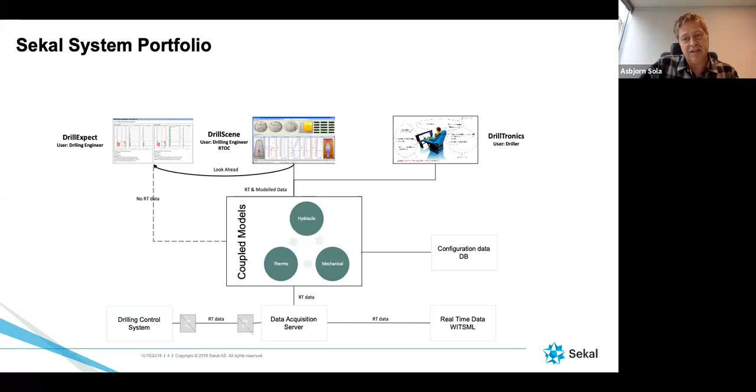When you have the safeguards active, you can then start running autonomous functions, like starting and stopping the mud pumps. I'll get back to that further.

On top of this, we have a screen currently under massive development called DrillAware, a screen that could be put in front of any relevant user — the driller, a real-time operation center, or a drilling engineer who is just planning a well.

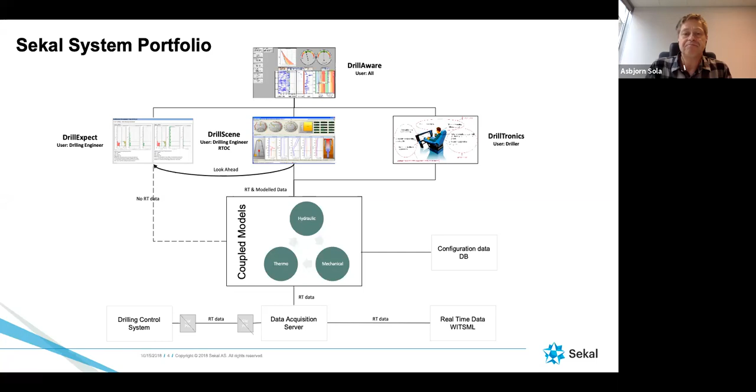So the experienced value proposition that we see is that the elements that we address is the NPT and the safety. So everyone, of course, wants to secure well integrity and make sure that everyone stays within the pressure window. So it's about avoiding swab, avoiding collapse, avoiding surge. So you see there on the graph that the modeled ECD and ESD can be shown at any time in real time. And you don't even have to have wired pipe for that to be shown like that.

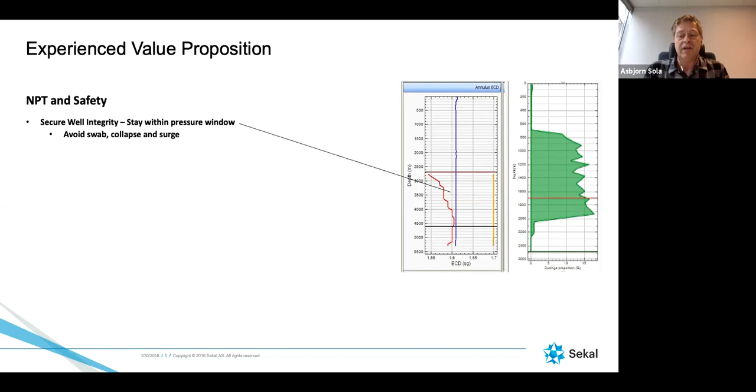Next thing is that you don't want to have your pipe stuck. And if we look into statistics from DrillScene, DrillScene has been applied for more than 350 wells at the moment. And we got some statistics from the Norwegian Petroleum Directorate, and we started looking into how many sidetracks, technical sidetracks, there have been with DrillScene being used compared to the statistics before DrillScene was used. And statistically, we can then see that we have saved 77 technical sidetracks.

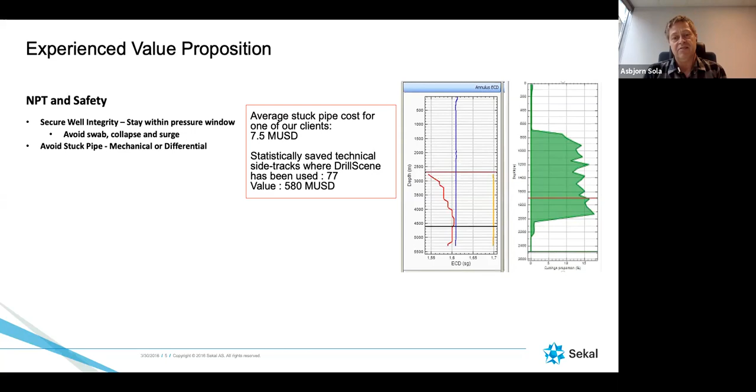And one of the clients, which is an offshore operator, says that the average cost of a sidetrack is $7.5 million. If you do the very big math here, that's $580 million in statistical sidetracks that have not taken place.

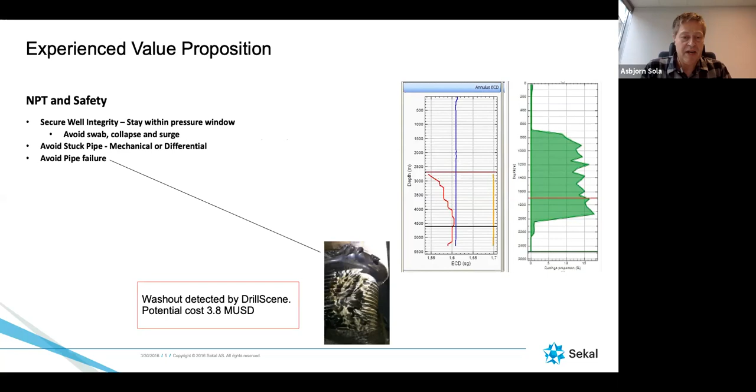Another element is that you don't want your pipe to fail. And we have a lot of cases where we have guided the client that you most likely have a pipe washout situation. And then it's up to the client whether to trip out or to look further into if that is really an issue. So the example picture you see there, we have had a lot of these cases, and you can imagine the cost of that should that twist off, and you have at best a successful fishing job.

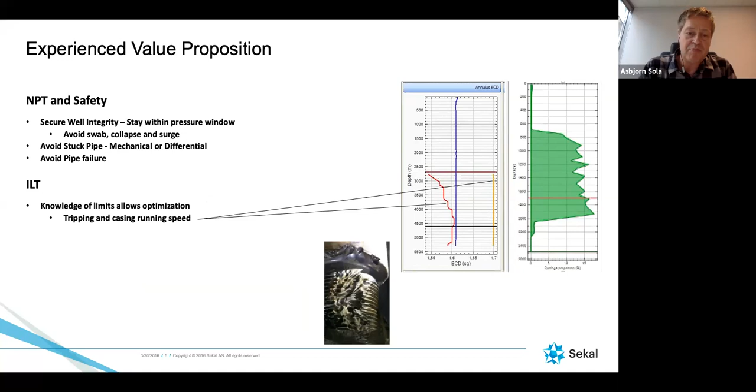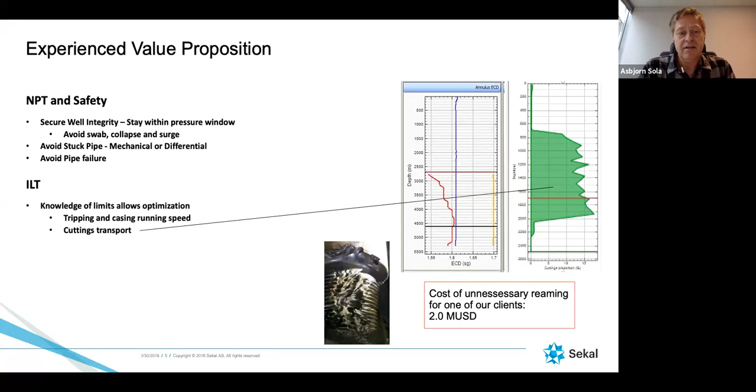That's the NPT element. If we go over to the ILT, or invisible lost time elements, when you do modeling and you have good input and configuration as we have today, then you know the limits of your wellbore. And that is, of course, much easier to optimize. So you can then better optimize tripping and casing running speed. You can have a view of how is your cutting load in your wellbore. Are you building cuttings bed? How is the cuttings in suspension in your mud, in your wellbore, and where are they?

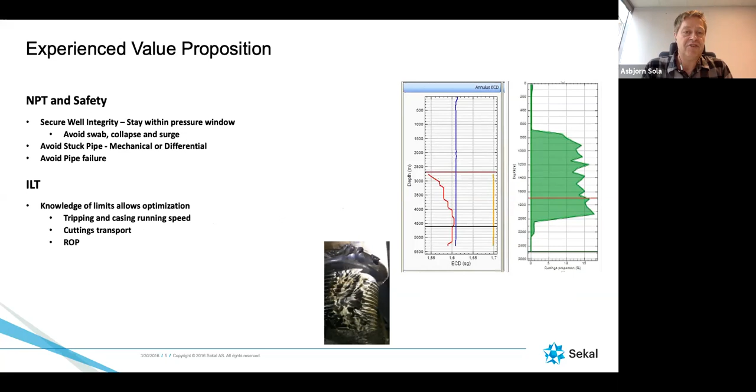And of course, ROP, you can then use these models to guide the ROP in such a way that you're not running necessarily at the maximum ROP, but you're running at that ROP that makes sure that you stay in your window and you maintain sufficient cuttings transport.

DrillTronics is the drilling automation tool, and that was first time installed on Statfjord C in 2013. Since then, several floaters and also fixed installations have taken DrillTronics on board. And at the moment, there have been 8 of these installations.

Safeguarding, what is that? Well, safeguarding is calculating what is the maximum pump acceleration that you could have right now. What is the maximum pump rate you could have? What is the maximum pump pressure you could have? What are the maximum weights you could have on set down and over pull? And what's the maximum torque?

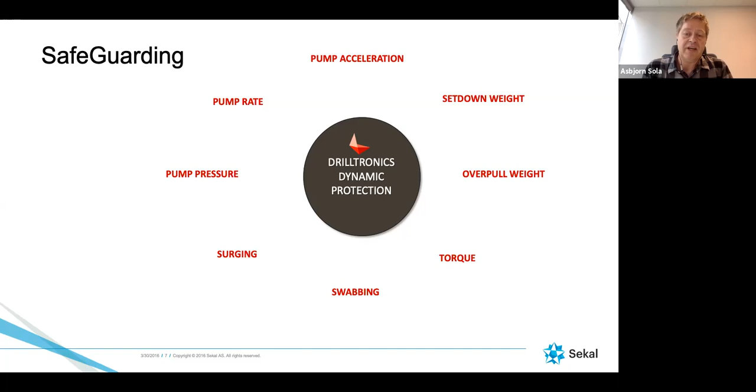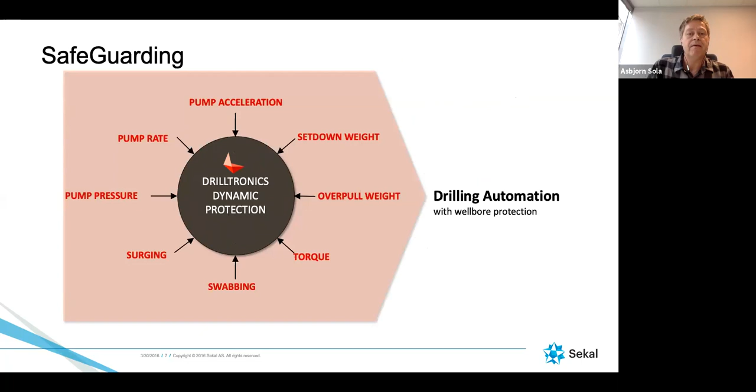And also, what is the velocity and acceleration you could have of the drill string or the casing to avoid surging and swabbing? These are the elements that are calculated on the signals we get from the drilling control system, and then it's sent back to the drilling control system to make sure that the driller stays within this envelope. Having this in place, which we call DrillTronics Core or safeguards, that's the one that addresses the NPT elements.

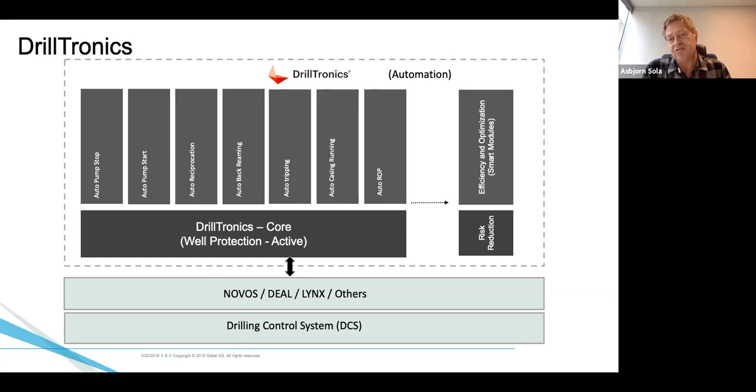On top of that, you then have automatic pump start and stop. You have automatic reciprocation, you have automatic back reaming, automatic tripping, casing running, and we are actually showing next week, together with NOV and Norse, the new function called Smart Auto ROP that I just talked about earlier. This can be integrated with systems like Novos, Deal, and also Lynx, but there are also other systems that could be relevant for such an integration.

I'm just going to show you some examples that we have done where we have used cases where something went wrong on the left-hand side. In this case, you see they are tripping out of the hole. They are violating the pore gradient, the red band there, and they are taking an influx. We ran this through DrillTronics just to see what would be the ECD when DrillTronics is applied. And with DrillTronics applied, the tripping speed will be limited so that the ECD is not going below the pore gradient.

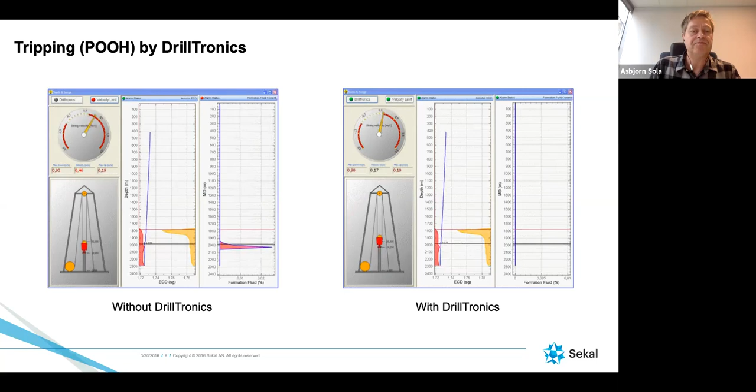Similar setup is here by starting the mud pumps. Left-hand side, the driller is very quick on starting the pumps, causing a fracture at the shoe. Whereas you see on the right-hand side that the driller is starting this according to a calculated procedure, making sure that pressure pulses do not go above your weakest point when it comes to fracture.

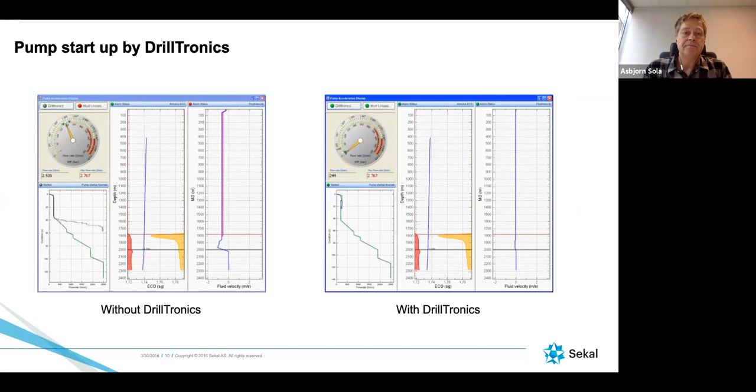This is another example where we tried to take friction test manually at Statfjord C, and then we did it automatically with DrillTronics. And you see on the left-hand side, it's picking up, rotating, slacking off, and it's not consistent at all. And you can imagine these are frictions that you're building roadmaps on, and then you might wonder, why are your roadmaps not correct? So having friction tests that are consistent is a high value to the client.

We have, though, during the last year, made a transient torque and drag model that actually performs the friction test automatically. So you're not in need to do these friction tests if you're running, for example, the transient torque and drag model.

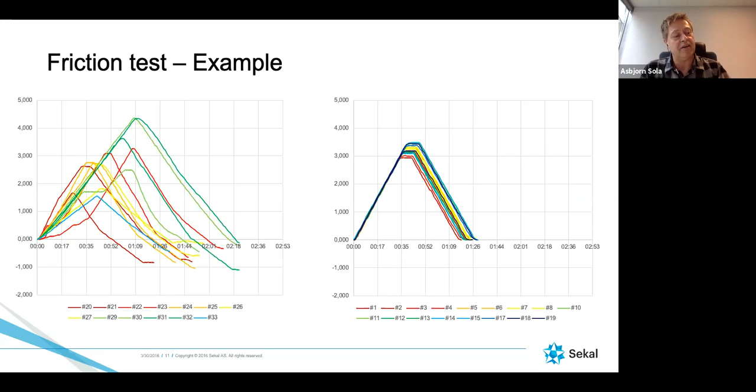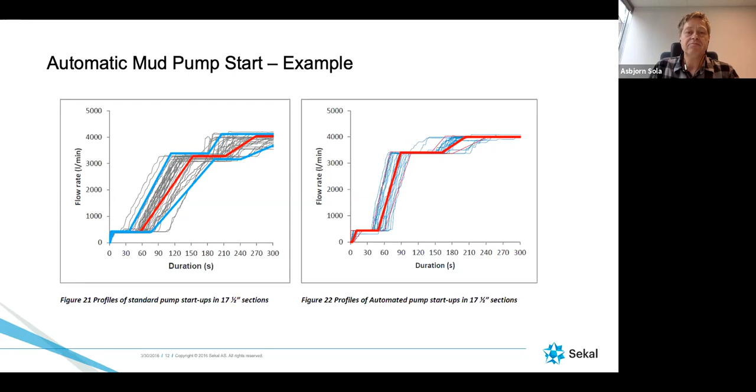Smart Auto ROP, we talked a little bit about that, and that is actually performing automatically drilling of a stand. So it executes automatically ROP performance tests. It controls the weight on bit, the RPM, and the flow rate to optimize the ROP, taking into account cuttings transport, risk of drill string vibration, and also risk of formation washouts while applying real-time safeguards.

So, as I said, there's going to be for several operators a presentation Tuesday next week together with NOV to show this functionality. We're probably going to set up some extra webinars around this. So if anyone wants to have a look at that, you're welcome, of course, to give us a note on that.

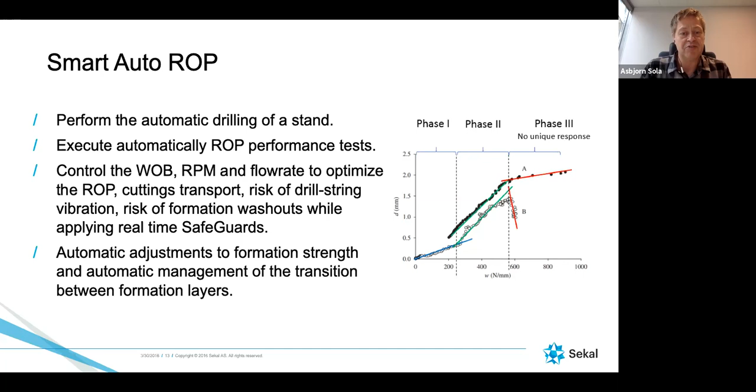The next procedure we are starting to build is actually to look into how we could go from slips to drilling and drilling to slips automatically, and actually tag bottom where we are using our models. Our models take into account the stretch of the string, so it's quite accurate when we are calculating the bottom of the hole and how long the drill string is. So this is a function that is also going to be developed, and NOV is also going to be part of this procedure here.

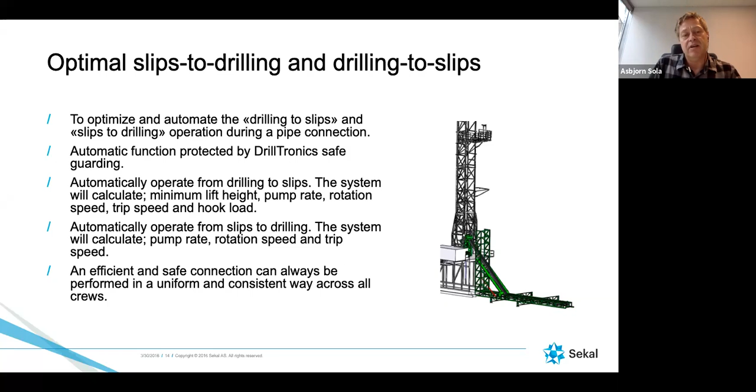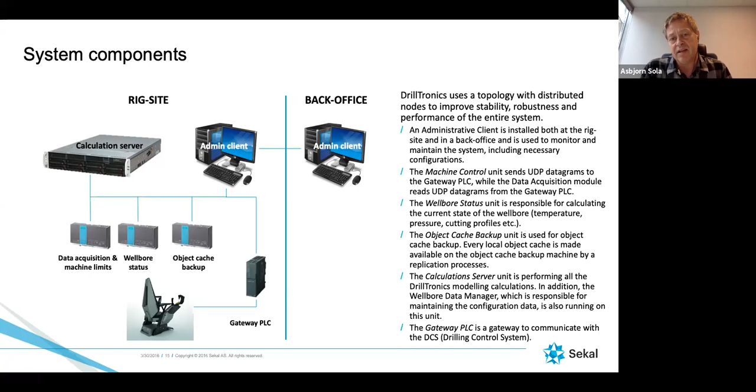How does it look on your rig? Well, on DrillTronics, we have on the rig, very often in the same cabinet as the drilling control system, or just beside the drilling control system, a calculation server. There are 3 embedded PCs from, typically in this case, Siemens. And the only integration point is a gateway PLC to the drilling control system. Then there is an admin client on the rig, and there's another one on shore.

I'll end this presentation by showing you a replay, and this is a recent well that has been drilled by an operator in the Gulf of Mexico. And in this case here, the well collapsed, and they could not understand what actually happened. So in this case here, you see there is a weak point there with a red band for collapse. And that is at 11.462 pounds per gallon.

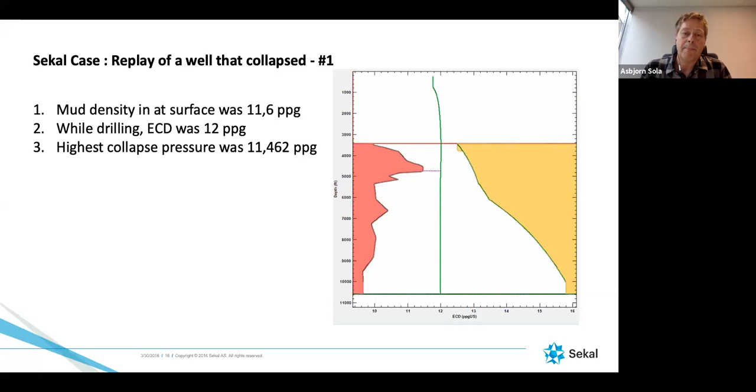The mud density at the surface is 11.6, and when they're drilling, the ECD is 12 pounds per gallon. Okay, they stopped the pumps, and they assume that the ESD is then dropping to 11.6, but they are not taking into account temperature effects.

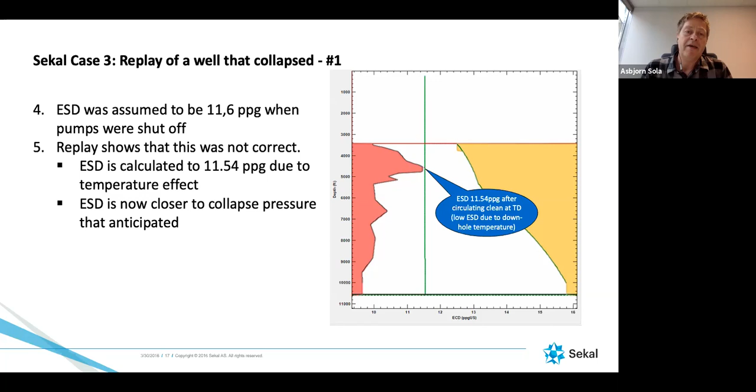So when we did the replay, we see that the ESD was not 11.6, it's actually 11.54 because of the temperature effect. So you're actually pretty close to that collapse limit. So what happens then when they start tripping out of the hole? They trip out rather slowly at 24 feet per minute. And then the ESD is actually dropping to 11.41. And that is causing a swab in that well bore and actually collapsing the well.

When we looked into this, we saw that the maximum speed they actually could have had was 10 feet per minute, and then they would not have crossed the boundaries. This well bore was lost, and this is the main reason for us coming into this client and doing more business with this client.

That is my last slide, so I think I'm in the time zone. Yeah, that was excellent, Asbjørn. Thanks for that really good overview of what autonomous drilling can do in terms of safeguarding wells.

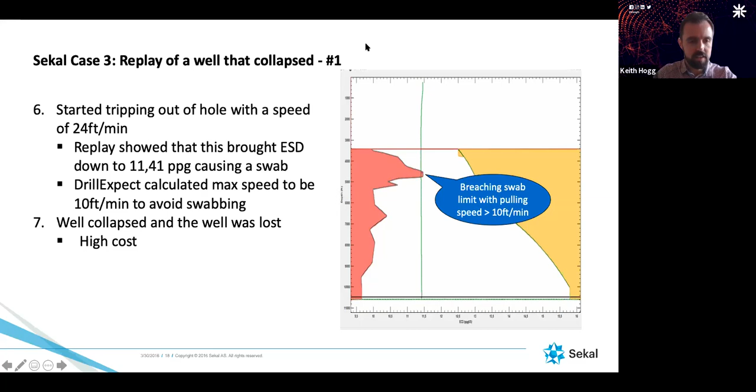I think for me as well, one thing that occurred to me just as I was listening to your presentation is that we have a lot of data nowadays, with surface sensors and downhole tools, and there's a lot of data for drillers to be looking at and monitoring whilst they're drilling a well. So I think from a human factor perspective, anything that we can do to help the drillers with this kind of cognitive overload when they're looking at all this data and monitoring and looking after personnel as well, I think's really helpful. So no, it's really good.

So I just noticed one question coming in there just as you were talking. So I'll just pull it up. So we've got a question in from Carl Jeffrey, and he's saying, how do you handle liability if an accident happens due to the system controlled by your software?

It's a good question, and the clients we approach are the operators, and the way the system works is you either have the driller pulling the joysticks and causing an issue that might end up with something going wrong. So what we're actually doing is, instead of sending the joystick signal, we are overriding these signals, but there are still all the systems in place that the drilling control system is taking care of, like anti-collision, and machinery cannot perform better, of course, than the limitation of the machines, etc.